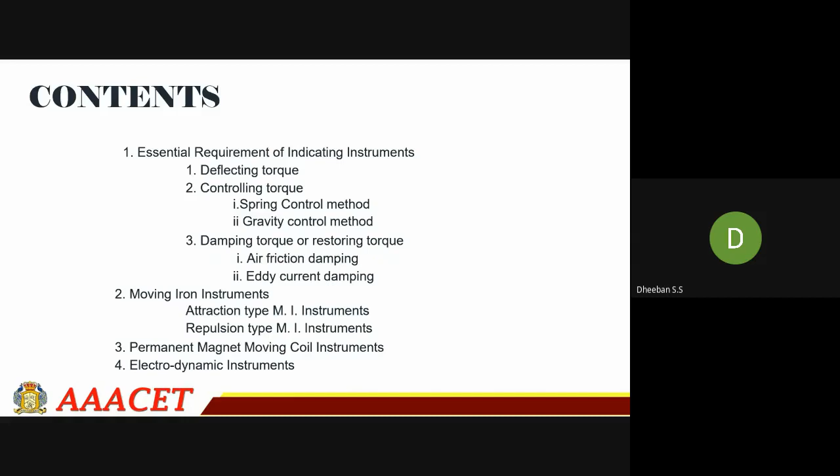The contents of the first two lectures will be such that in the first lecture we'll be dealing up to the essential requirement of the indicating instruments. The next phase will be dealing with types of instruments.

So the essential requirement of the indicating instruments is the minimum requirement for measuring any electrical quantity. How you can measure any electrical quantity, we will see with respect to indicating instruments.

This comprises the following: starting with your deflecting torque, followed by the controlling torque. This controlling torque can again be classified into two types: spring control and gravity control. The third type of torque to consider as essential requirement is your damping torque, or restoring torque.

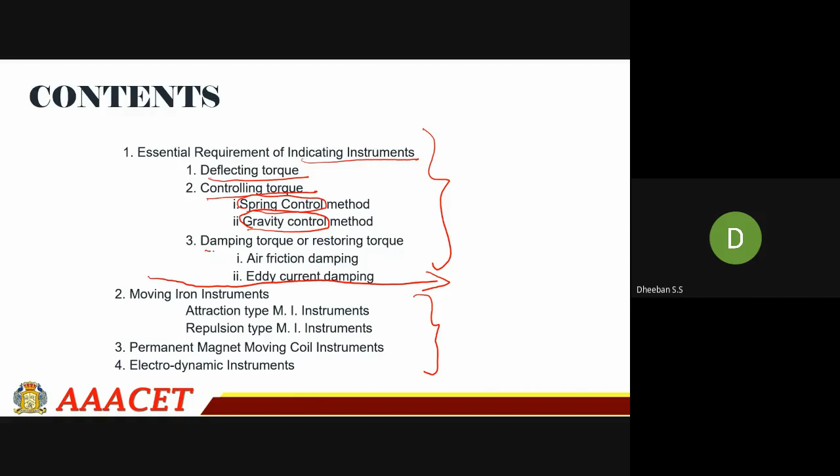This deflecting torque is the minimum torque required for deflecting the pointer. You can take this as the starting point, the starting force required to move the pointer.

After that, the controlling torque is the torque which moves this pointer to a particular value. You can take this as a point. So from the first position to the second position, if you want to move, you need some kind of force or torque. That torque is provided by your controlling torque.

After reaching that position A, it should not move past point A. It has to be restricted up to point A, and this can be achieved by your damping torque. So these are the three major tasks which you have to consider as essential for your indicating instruments.

In the second half, we will be dealing with moving iron instruments, the different types of instruments we will be seeing. Basically we will see about moving iron instruments, then moving coil instruments. So we'll be getting into it.

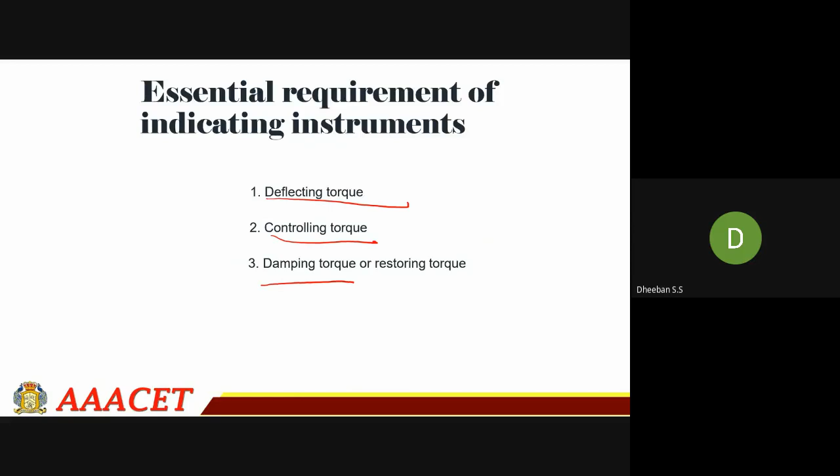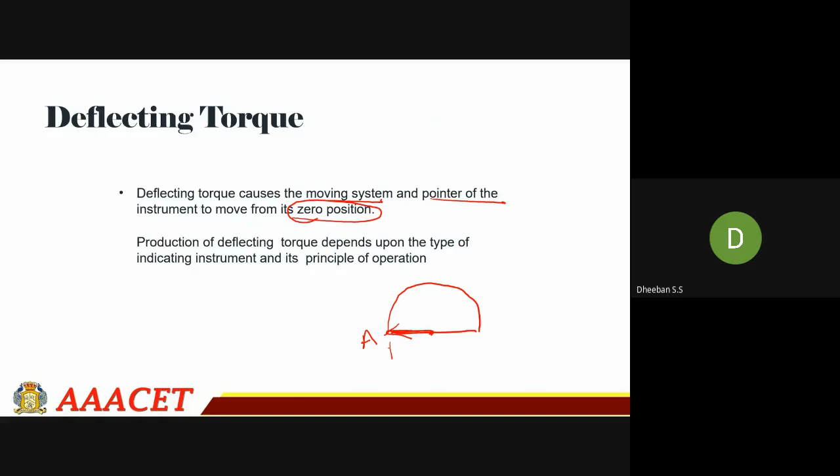Deflecting torque, as I said previously, causes the moving system and the pointer of the instrument to move from its zero position. So if this is a meter scale, if this is the pointer, from the initial point A it starts to move. For that you need a torque, and that torque is provided by your deflecting torque.

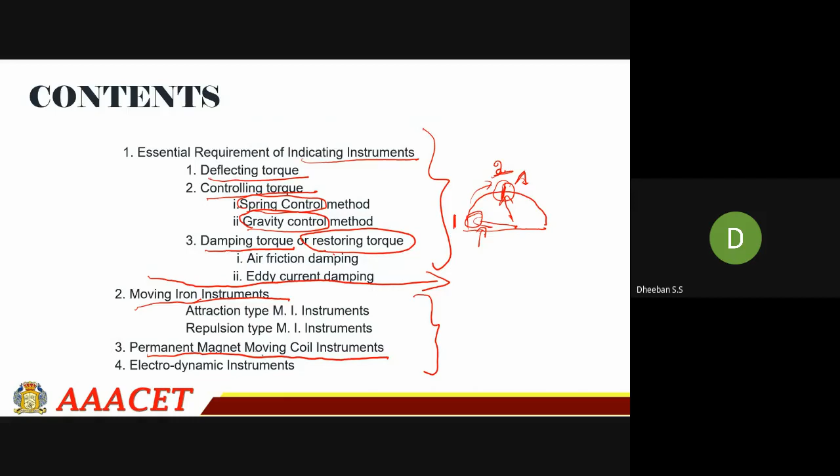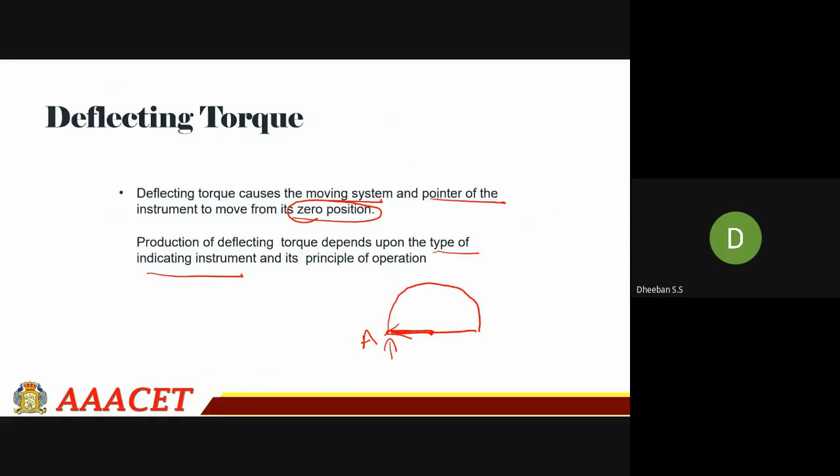The production of deflecting torque depends upon the type of indicating instrument. There are three types of indicating instruments given here: first is your moving iron instrument, second is your permanent magnet moving coil instrument, and third is your electrodynamic instrument. So based upon the type of instrument used, the deflecting torque will be generated.

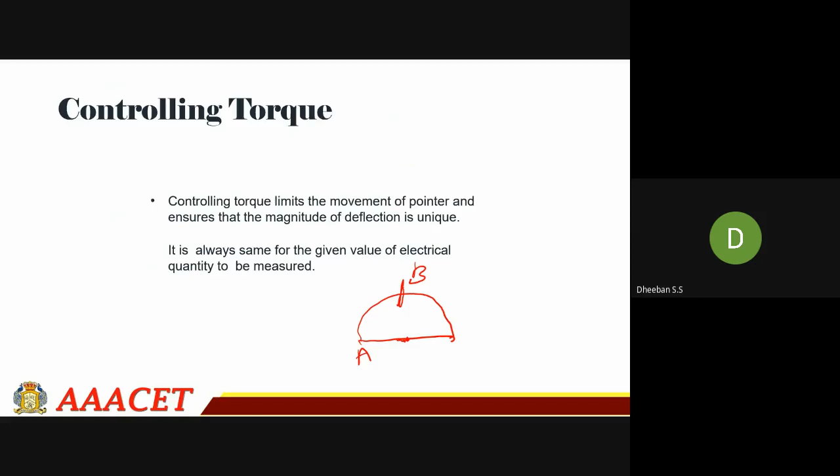Coming to the controlling torque: the pointer will be moving from position A, so it has to reach position B. From point A, the controlling torque limits the movement of the pointer and ensures the magnitude of the deflection.

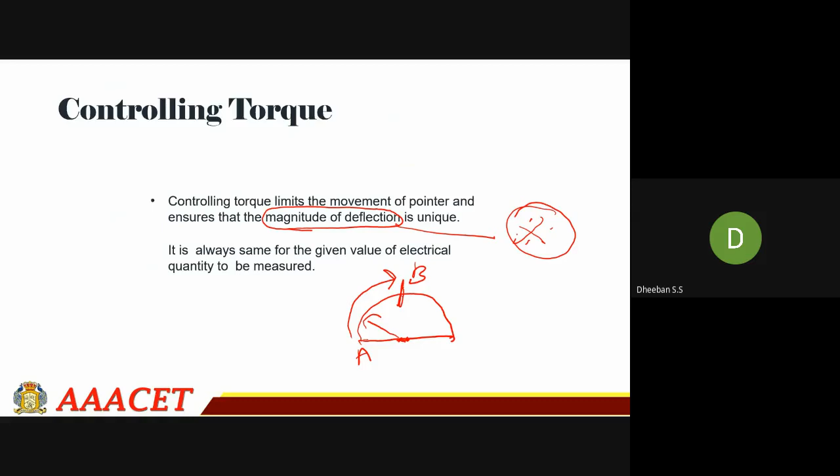This is the important point to consider. The magnitude of deflection refers to the point at which the movement goes from the initial position to the end position. The pointer has to cover from here to the B position, from A position to B position, and this coverage area is controlled by your controlling torque. It is always the same for a given value of the electrical quantity to be measured.

This controlling torque is generally of two types, starting with the spring control method. You can move that pointer by your spring control or by the gravity control method.

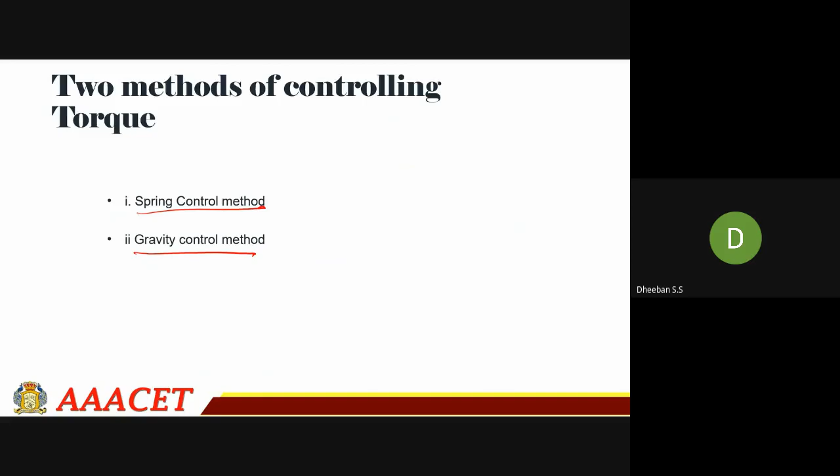Coming to the spring control, this is how it looks like. This consists of two phosphor bronze hairsprings. This is a hairspring, this refers to one hairspring, and this refers to another hairspring. These will be attached to a spindle - so this is what your spindle looks like.

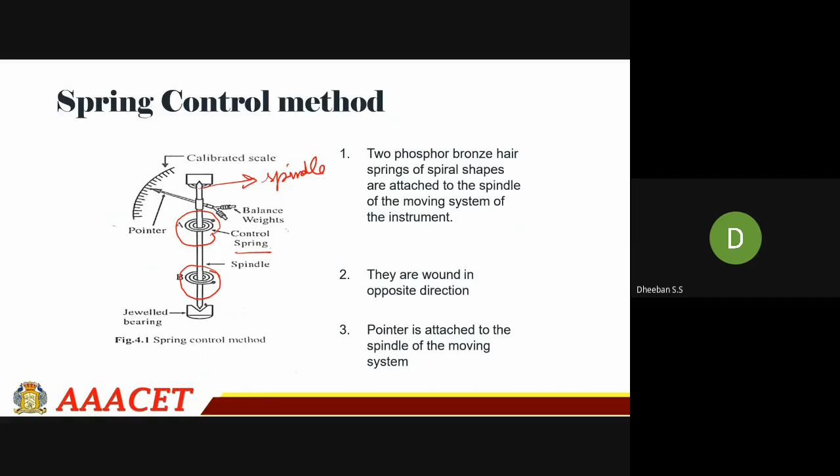So this is your spindle of the moving system of the instrument. These two control springs will be wound such that they are in the opposite direction of each other. This is clearly evident from the figure itself.

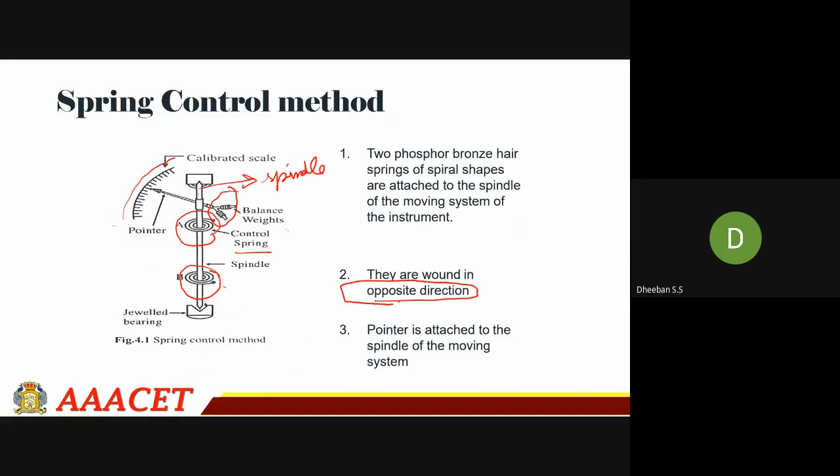The pointer is attached to the spindle of the moving system. So this is the spindle, and within it the pointer will be attached. This is the pointer, and this is your calibrated scale. The other end of the pointer will be balanced by a balanced weight. So this is the basic structure of your spring control.

Coming to the working, how it works when the moving system is deflected: one spring gets wound and the other gets unwound. At the initial point, it will be crossing your deflecting torque. After the deflecting torque, there will be some movement. At that time, one spring will be contracting and the other spring will be expanding. This results in the controlling torque, whose magnitude is directly proportional to the angle of deflection.

So the torque TC will be directly proportional to the angle of deflection theta, that is, the angle of deflection from the zero point to your control value, which is your theta. So TD, the deflecting torque, is directly proportional to the current I. TD is your deflecting torque, and TC is directly proportional to the deflecting angle.

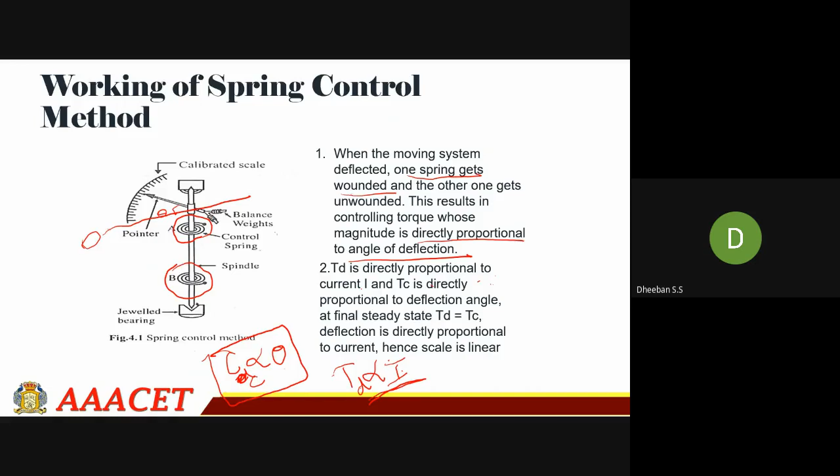So your TD will be directly proportional to the current I at the initial stage. Coming to the final stage, after the end of the deflecting torque, what happens is that both your controlling torque and the deflecting torque will be the same. Due to this property, you will be having a linear scale. In some instruments, like the wattmeter, the scale won't be linear—there the process is entirely different. Wherever a linear scale is applicable, you can see these kinds of spring control methods.

Moving to gravity control. As the name suggests, the major part is played by gravity. In this method, a small weight is attached to the spindle of the moving system. So here you can see this is your spindle.

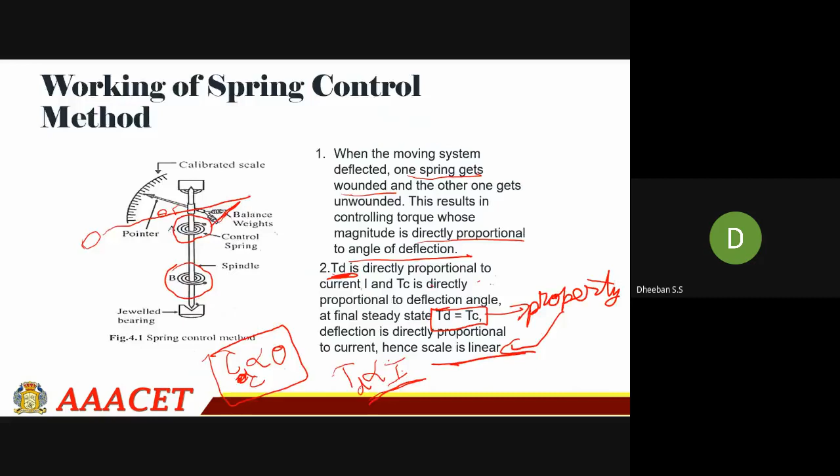Here they have given you the top view. What you can see here is your control weight. Similar to the balanced weight, here you will be having a control weight, due to the gravitational pull.

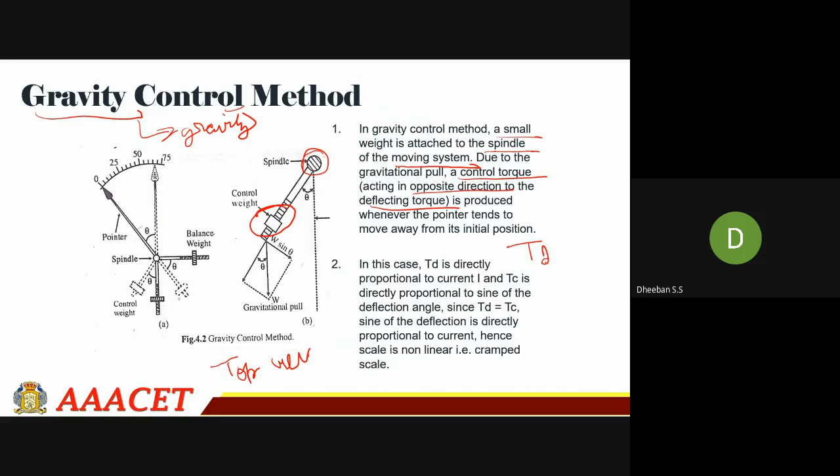Due to the gravitational pull, a control torque acting in the opposite direction of the deflecting torque is produced over this control weight. So in this case, TD is directly proportional to the current, the same criteria as in the previous condition, but here TC is directly proportional to the sine of theta.

In the previous case, we didn't take into account any gravity force, but here we take the gravity force into account. You have to find the resultant of the torque by using your vertical and horizontal components. Here you can see clearly: this is your horizontal component, and this is your vertical component. When finding the resultant, you take the combination of these two values.

With respect to this, your control torque will always be directly proportional to the sine of the angle of deflection, and this is the main reason your scale is non-linear—as in the case of the wattmeter. So instruments with non-linear scales make use of this gravity control method.

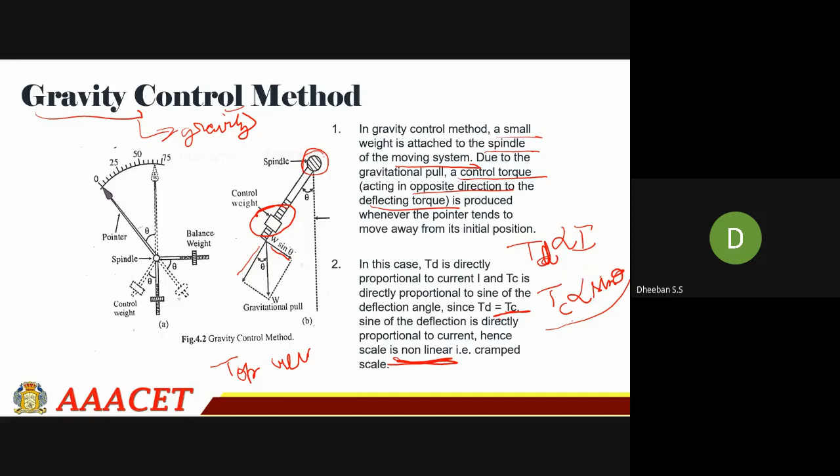Moving to the final torque, damping torque. The damping torque minimizes the oscillation of the pointer. So again, coming to the pointer scale.

So this is the A position, this is the B position, and this is the C position. The pointer has to travel from A to C. The initial condition starts from here, so after some time it comes to B, and at the end it comes to C. So C is the final point.

So in absence of this torque, what happens? The pointer continues to oscillate. It moves from A to D and D to A. Okay, such kind of oscillation is possible.

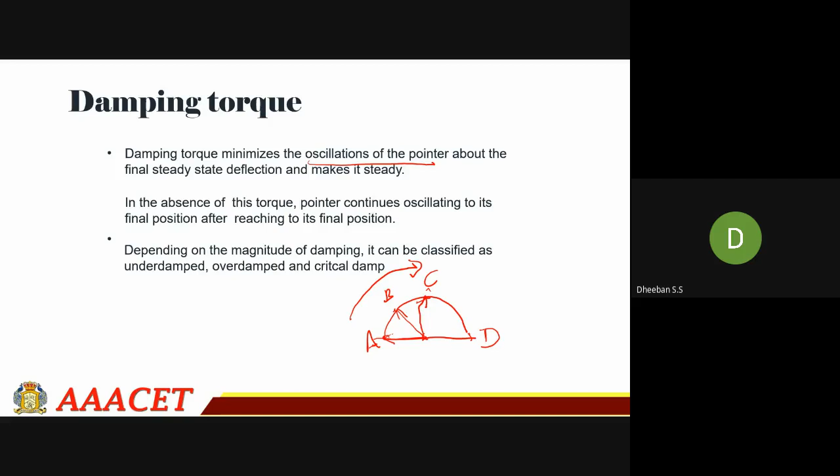So depending on the magnitude of the damping, it can be classified as underdamped, overdamped, and critically damped.

So damping methods. The first one is air friction damping, where with the help of air, friction will be generated and damping occurs. The second one is eddy current damping, which is applicable in case of your current transformer and potential transformer.

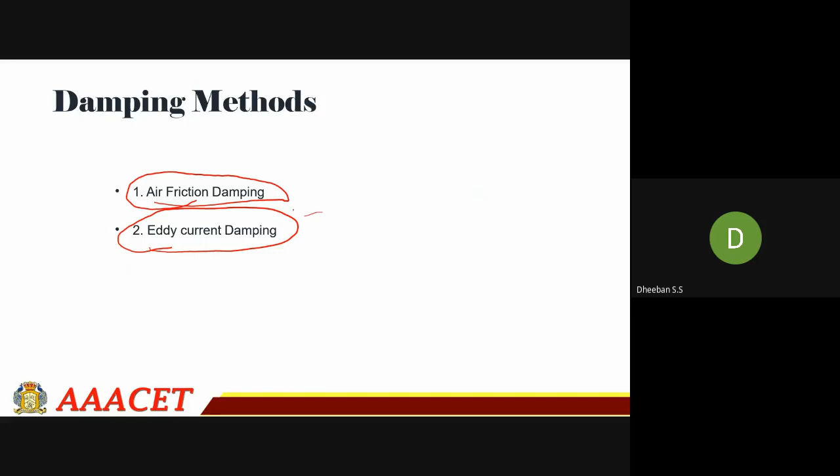Coming to air friction damping, what happens is that a light aluminum frame will be attached to the moving system, with a piston. This air friction damping is more or less what you find in your speedometers. Speedometers in vehicles make use of this kind of air friction damping.

So a light aluminum frame will be attached to the moving system, and this piston moves. So here you can see the piston, and this is the chamber. This piston will be moving in the air chamber.

At the time of oscillation of the moving system or the pointer, the piston will be moving into the chamber. When it moves into the chamber, the air gets compressed because there is already air present in the chamber. So when it's coming out, the air will be flowing inside and gets compressed over here, and if it is compressed, there will be formation of very high pressure.

So very high pressure will be formed, and this pressure will be opposing the motion of the piston, and therefore the moving system also gets opposed by this pressure developed in the air chamber.

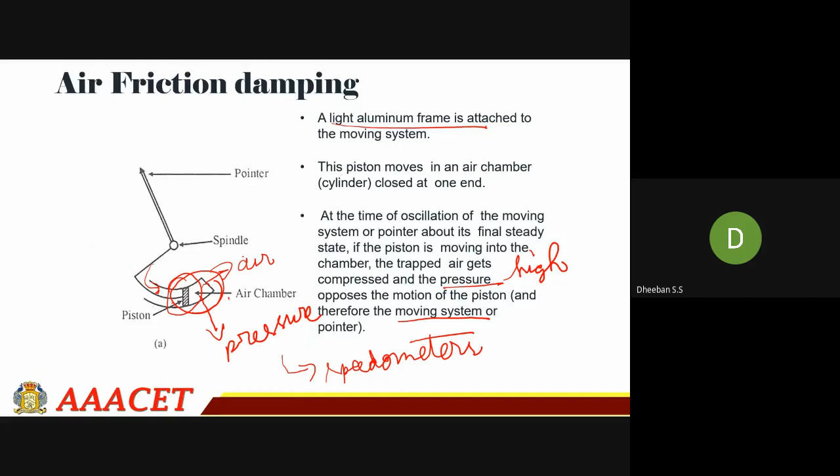Similarly, if the piston is moving out of the chamber, in case of this outward motion, the pressure in the closed chamber falls and becomes less than the air pressure. There will be a drop in the pressure, a pressure difference. So the motion is thus again opposed, and oscillations will be damped.

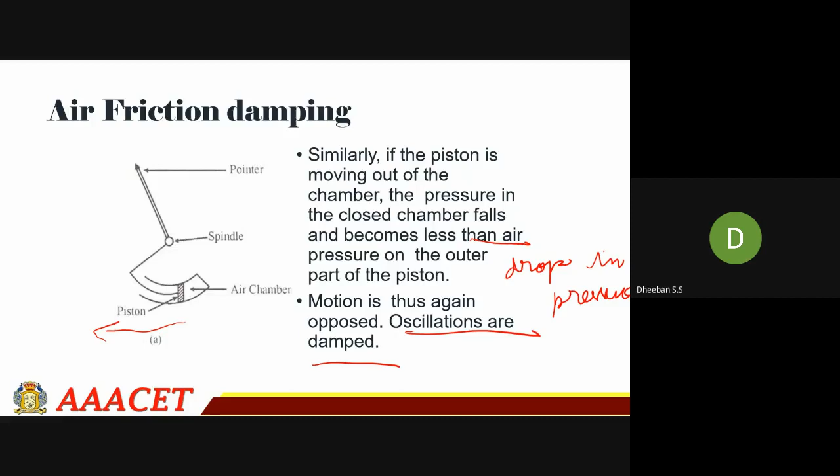So coming to the final damping method, this is nothing but the eddy current method. You know how eddy currents are produced - we have already seen this with respect to your transformer.

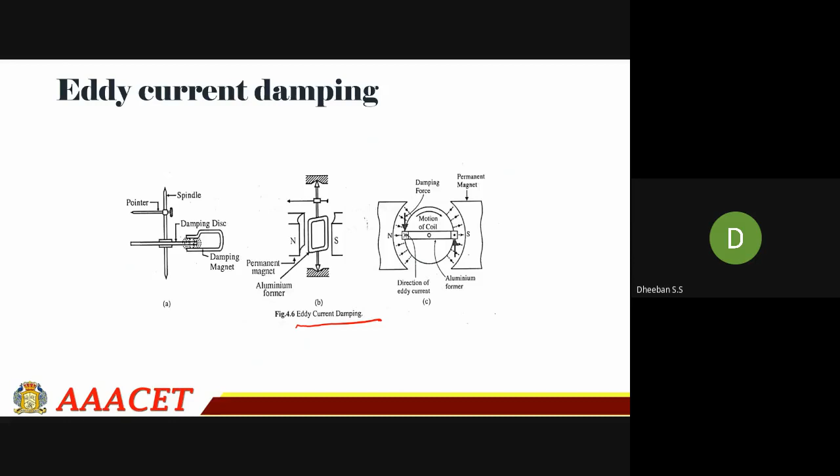So here what happens is that this is the arrangement. Here will be your damping magnet, and this is your pointer and spindle. Parallel to here there will be the calibrated scale - you can see this in your energy meters and all.

There will be a permanent magnet, and this permanent magnet will be inducing an EMF. We'll be seeing how this is more or less similar to the operation of your transformer.

So an aluminum frame or damping disc will be mounted on the spindle, free to rotate in the magnetic field. At figure C, you can see the rotation of the disk, provided by the damping magnets.

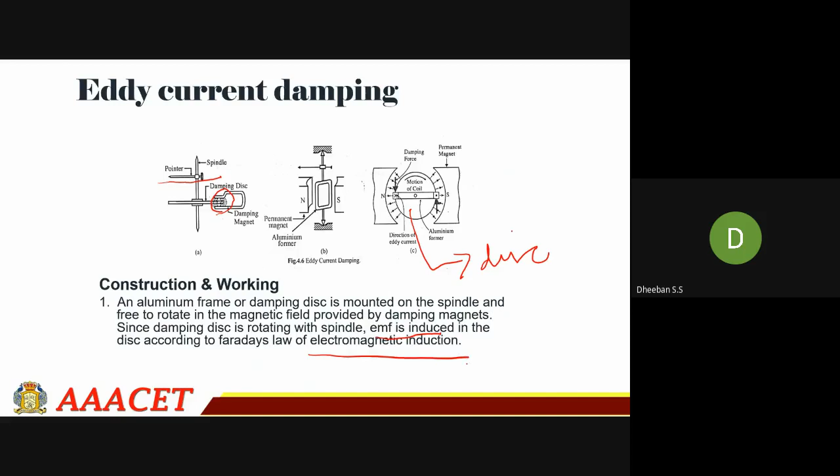Since this disk is rotating with the spindle, an EMF will be induced. As I said, whenever a current-carrying conductor cuts a magnetic field, there will be an EMF induced in it - that's your Faraday's laws of electromagnetic induction, and it clearly gets aligned with that.

Since the disk is a closed circuit, the eddy current forms in concentric circles, which will be induced in the damping disk. The interaction between this eddy current and the magnetic field develops a force on the damping disk - this is the force which opposes the movement of the sheet or the pointer.

So this is with respect to the three important torques which you have to consider as an essential requirement for your measuring instruments. Okay, thank you.